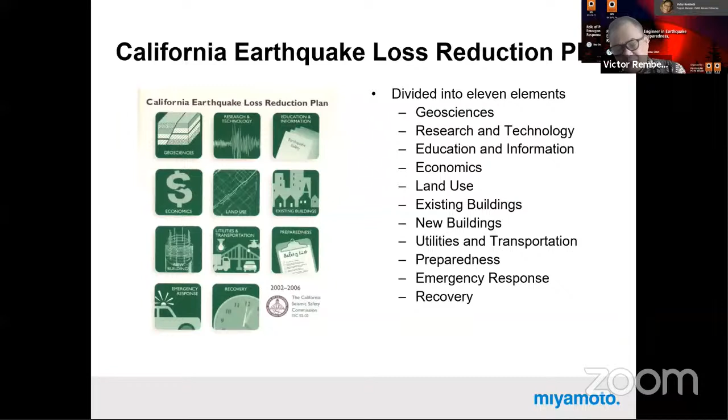Essentially, we provide many different guidance documents. For example, this is a homeowner's guide for earthquake safety that we just recently reviewed again.

For commercial business owners, their assets can be protected - showing what kind of things they can do. That kind of technical guidance is all done by California professional engineers.

One of the things we do, through the agency, is provide hospital seismic safety guidance in California. Since the late 1990s, California has been trying to do seismic strengthening of its hospitals.

And it's not been easy. Hospitals are very complicated architecturally - complicated structures and systems, and many are older buildings that are still being used. So doing the seismic strengthening is not an easy task. It takes decades essentially to provide the safety, but that's our mission. Hospitals are really important building assets after major disasters.

In California, we have a lot of unreinforced masonry buildings - essentially older structures. You see something like this in Indonesia, Jakarta, and many other places - essentially red brick construction. Here in California, in some cases, even large buildings are made of unreinforced masonry.

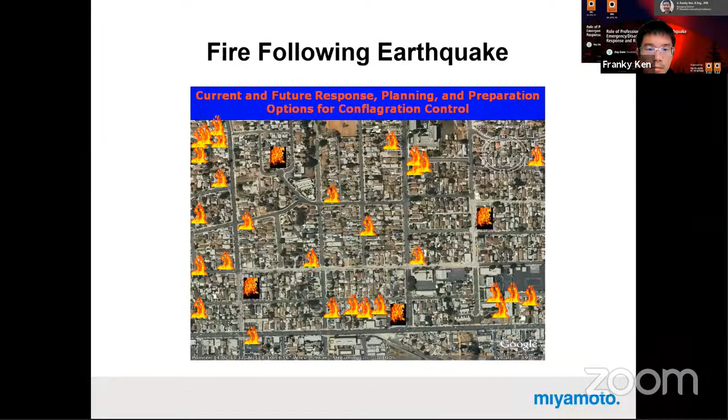In California, fire following an earthquake is a big deal, especially in a place like LA where many buildings, structures, and houses are made of wood. The expectation is that after a major earthquake, thousands of houses will be burning simultaneously. That's actually a big deal because the fire department doesn't have the capacity.

So the Seismic Safety Commission, a few years ago, set up cameras statewide to watch for fires. Now that particular fire camera network is being used for wildfires too, as you may have heard in the news - wildfires in mountains and forests are a very big threat.

This actually started as a seismic network, believe it or not, because you need a big bandwidth for the seismic network to understand the story of an eruption or earthquake. That same network bandwidth is now being used to capture the fire story - so it's multi-purpose, multi-hazard application.

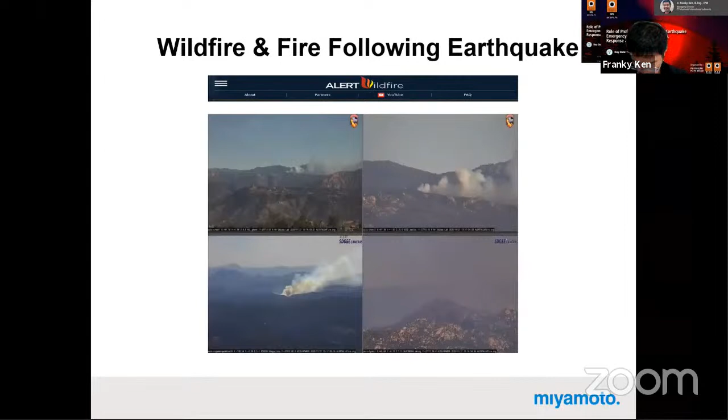At Cal OES, the Office of Emergency Services, one of the main things they do after a major earthquake is safety assessment, or damage assessment.

So-called green means inspected and safe to occupy, yellow means limited use because of certain existing damage, and red means major damage. These designations are commonly used globally now, but they actually originated from the 1980s documentation.

By the Applied Technology Council in California, and then after the California OES. That's how we started that. It was back in 2005.

So training is pretty elaborate. Training is for the evaluators themselves, the support engineers, inspectors, or architects, and also training for coordinators, such as building officials, emergency managers who actually deploy the engineers and organize forces themselves, and also training the trainers to evaluate, to train the evaluator system.

Because of engineers, many private professional engineers go to the site to evaluate damage, green, yellow, red, but they're doing it for public service. In many cases we do the volunteering. So essentially, when making that type of engineering rapid assessment, we need liability protection.

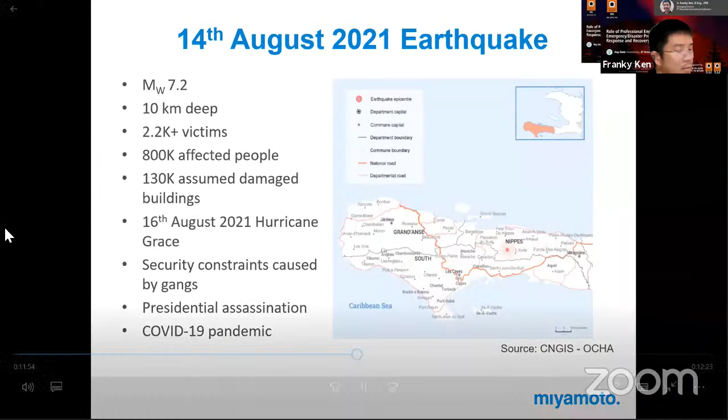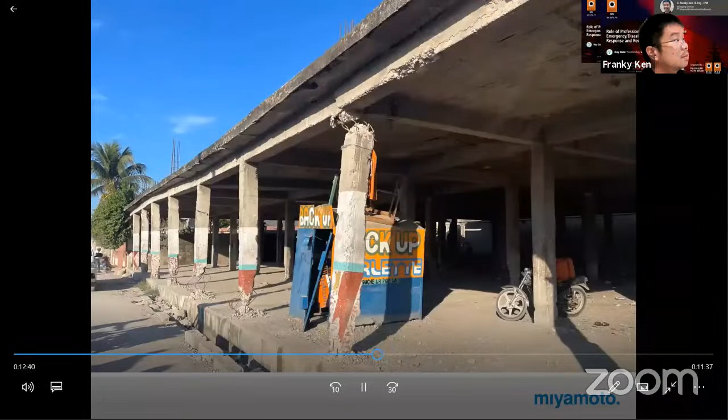This is probably where the earthquake shaking lasted 5 seconds or longer. It lost probably the whole thing. By the way, the city right here is quite far from the epicenter, at least 50, 60 kilometers or maybe more, but even that had quite a hit on construction.

It's a school again. Now, unfortunately, this earthquake happened early on a Saturday, so therefore the school was not in session, so there were very few students. If this had been during afternoon school hours, it's definitely a lot more loss.

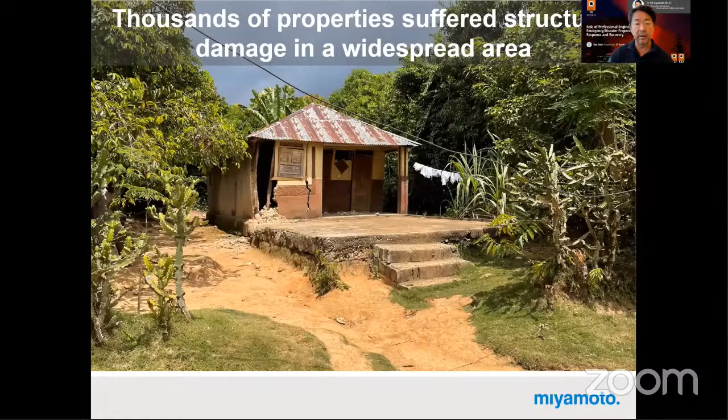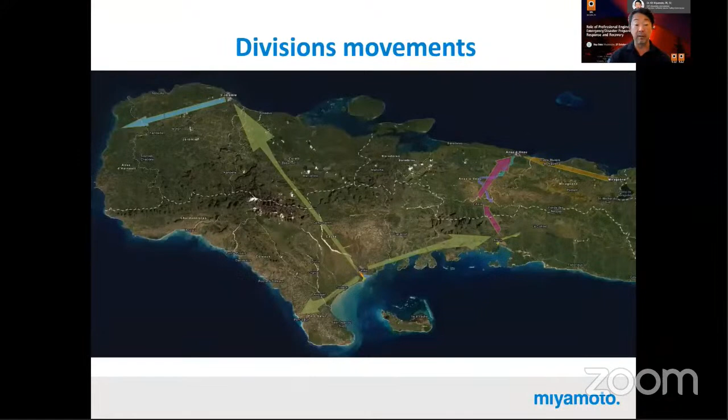Each assessment includes the basic building data, such as number of floors, type of use, material used, what kind of structural elements, concrete or wood, and also evaluates damage on the building and what percent of damage, and the measure for the damage, and displays it.

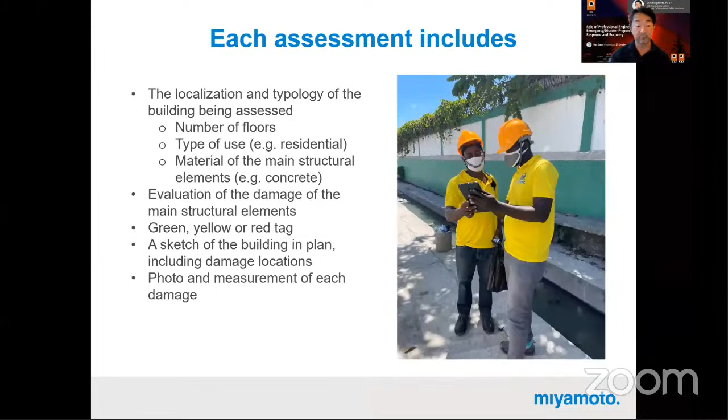Once the engineer identifies the damage pattern, reassigns the damage pattern, and measures the damage length or crack length, they can work out what methods have to be used here, and what quantity of materials, using an app called KoBoToolbox.

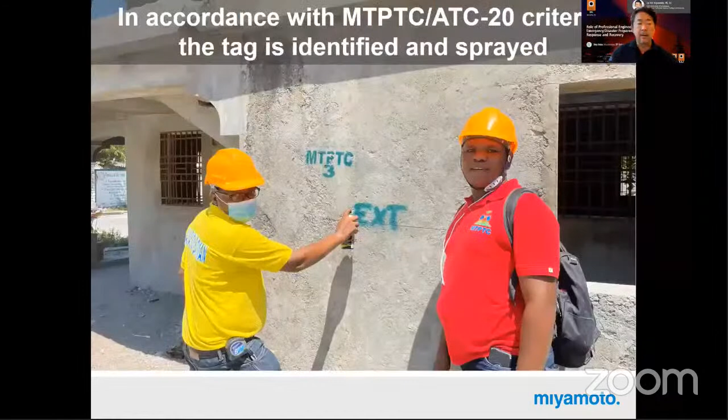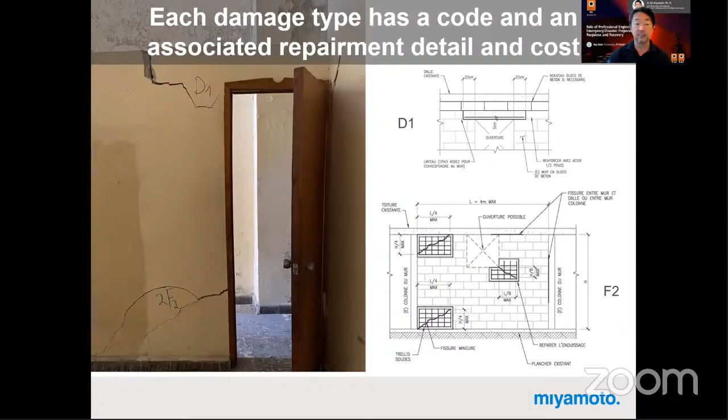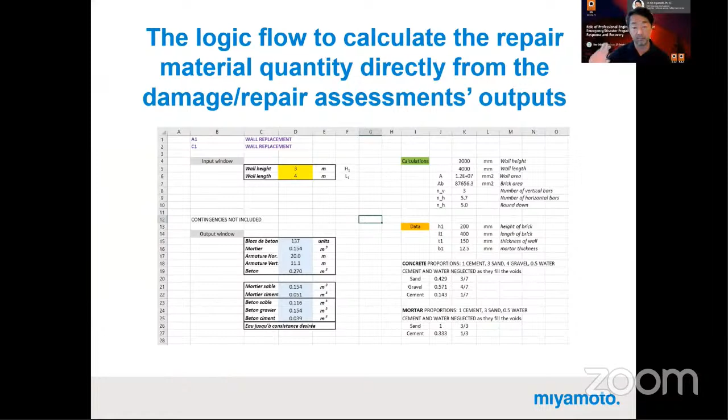On the actual building itself, this equation is analyzed, it's just a data analysis. So there's a logic flow in this KoBo database going to ArcGIS, logic flow calculations to quantify the repair functions.

So I think for professional engineers like you, our mission is extremely critical. Obviously before the disaster, for prevention, we can do a lot of things. We notice that...

Next step for us is to have wide communication and training campaigns for homeowners, contractors, and masons in the field, so they understand how to use that report, and also engage funding from different sources, because many people can't afford it. That's our job as engineers. So we are a very critical part of society. Thank you.

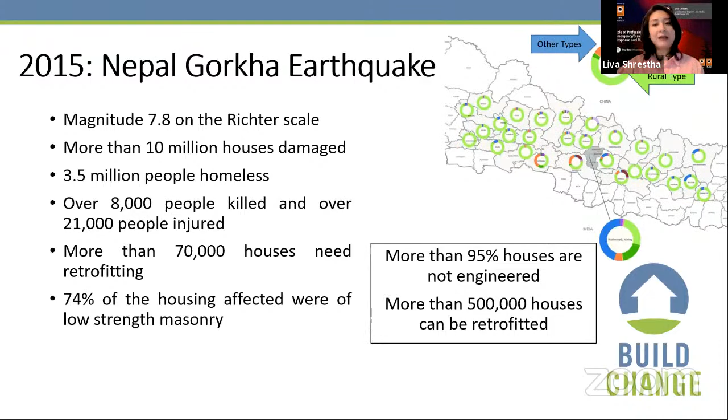In the spring of 2015, a massive earthquake with a magnitude of 7.8 on the Richter scale struck Nepal. In the aftermath, more than 10 million houses were damaged, rendering 3.5 million people homeless, and more than 70,000 houses needed retrofitting. About 74% of the housing affected were of low strength masonry, and more than 95% of the housing stock all over Nepal are not engineered.

When we talk about the housing sector and disasters, the problem that connects both is substandard housing, which refers to housing stock that does not meet safety standards, such as for earthquakes or typhoons.

In the immediate aftermath of a disaster, the priority was immediate rescue and relief. At this stage, temporary shelter was prioritized, and assessment of the nature and extent of damages and losses incurred by the disaster was done. Then comes the recovery phase, where people start to rebuild houses as permanent housing, and at this phase people are relatively motivated to invest in safe housing, and donors are also interested in funding and supporting safer housing.

However, the effects of the Nepal Gorkha earthquake was more pronounced in the rural villages than the urban centers. People in the rural villages resorted to traditional practices of house construction, and could neither afford hiring an engineer nor felt the need to do so.

Experienced structural engineering manpower willing to work for rural housing and informal settlements was scarce at that time, as the demand in the commercial sector in the urban centers was very high and more financially rewarding. On the other hand, there was an abundance of fresh graduates and young engineers without much experience, but very enthusiastic and willing to go out in the field.

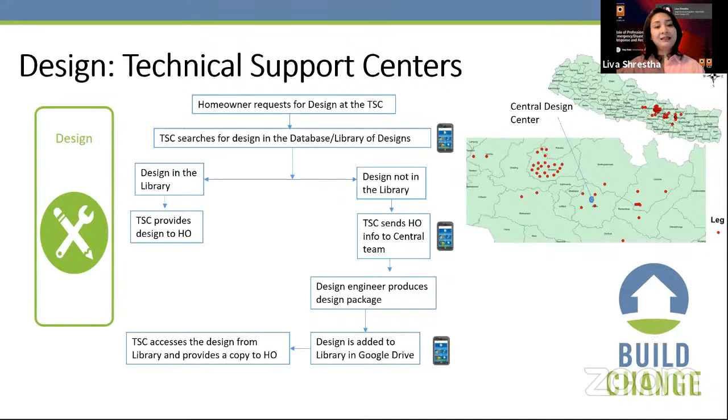The design process itself looked as such: the site engineer, who could be a very young graduate based in the district, would collect information from the homeowner and send a new design request to the system. The supervisor at the central level would then look at the requests coming in from all the TSC locations and assign them to design engineers in the team, who would again be professional engineers at the central level.

These designs would then be reviewed by a more experienced engineer and only forwarded to the design library if approved. If the review process doesn't approve it, the design is sent back to the design engineer with comments.

The advantage of having this mobile app-based database system was that it was possible to keep digital tracking of the design process, from when the homeowner made the first request to when it was delivered. This allowed us to identify flaws or bottlenecks in the design process and make changes to be more efficient as a team.

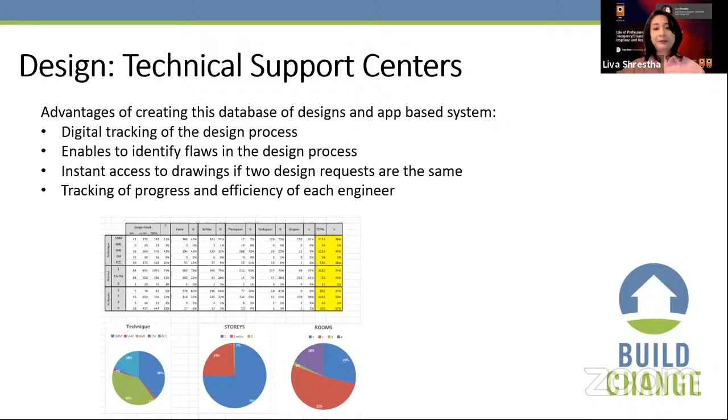Another feature of the system was that senior management and clients could be given access to a dashboard with desired information readily available at any given time.

Most of these buildings were 2 stories with an attic. Walls were usually 18 inches thick, made out of stone units in mud mortar. The floor system had a central timber girder beam, which supported the timber joists. These houses usually had a low story height of 2.1 meters, which was quite good for its stability.

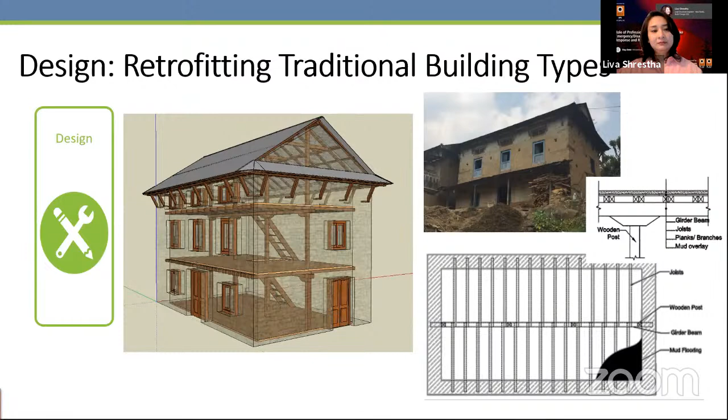Now we observed that the damages in these houses were also quite similar across the earthquake affected districts. Not surprising, of course, as they all had similar structural systems to start with. The most common damages observed were delamination of these thick walls, where the inner and outer wythes of the walls act as two separate walls and try to separate during the shaking.

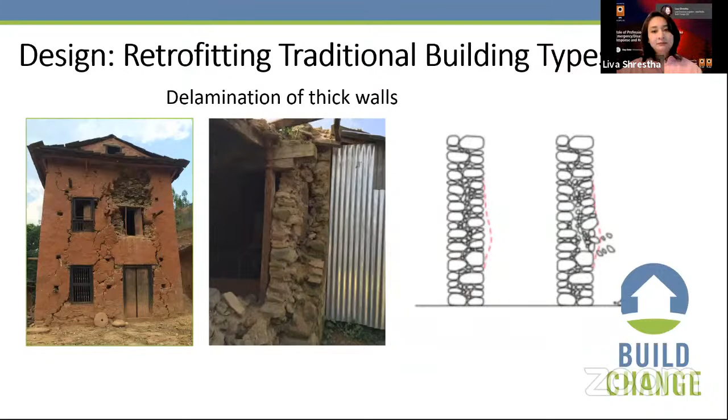We also observed a lot of gable wall collapses. We also observed a lot of short wall out-of-plane damages or collapses. And we also saw indications of common construction practices throughout these affected earthquake-affected districts.

Now, since the problems were similar, we could definitely provide a solution that was also similar for most of these houses. We knew that in a post-disaster situation, when the need for retrofitting is very high, the conventional method of preparing a bespoke design was just not feasible. We came up with a retrofit type design, which is one solution fits many situations.

The engineering rule checks were defined based on many design iterations of critical design conditions for these houses. A team of experienced engineers at the center produced the design based on various iterations of the building parameters, such as a range of variations in length, breadth, height of the house, range of variations in pier sizes, considering maximum number of openings in both directions, maximum openings in one direction and no opening in the other direction, and such. The team also carried out lab tests, such as the cyclic shear test under axial loads, dowel push-out tests, compression tests, etc.

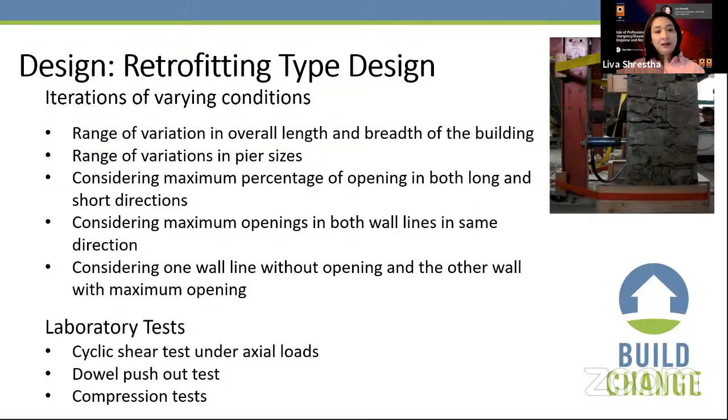Now, the type design included addressing the deficiencies observed in these buildings, such as fixing the delamination by providing a through connection through the thick walls, providing light gable walls instead of the heavy gables, providing light beams at the top of the walls at each floor to keep the walls together, providing strong backs to increase the out-of-plane capacity of walls, providing jacketing or plastering to increase the in-plane capacity of the walls, etc.

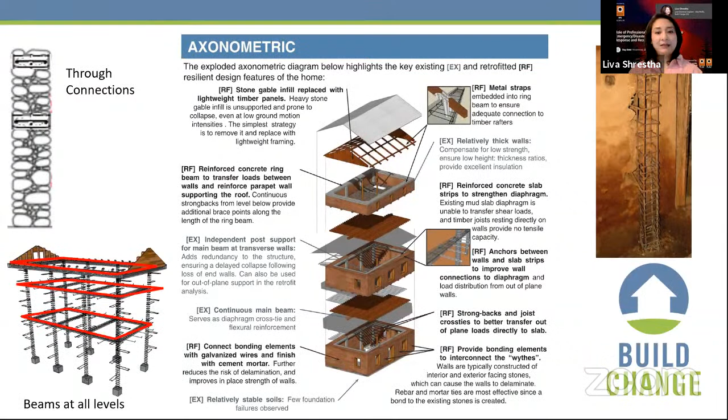Now, once the design was ready, the type design was presented in a format such that a very young graduate engineer could use it easily in the field, as the design could be readily applied to any building that fulfilled a set of predetermined applicability criteria, called the go, no-go criteria. This included grouping the buildings in terms of a list of criteria, such as building dimensions, existing damages, geotechnical conditions, opening alignments, opening numbers, etc., and applying the same design with simple rule checks to the ones that pass the criteria.

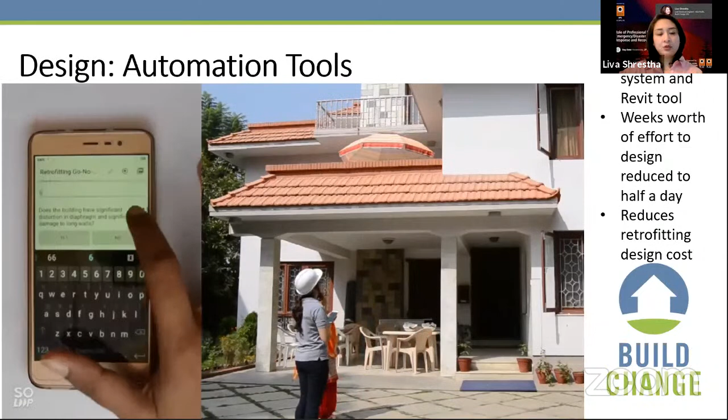Now, in addition to using the type design approach, which enabled thousands of young engineers to use the process, we have a video that shows the complete retrofitting process. I think the audio is not working.

No audio, cannot hear anything. So maybe I will just voice over it. It's basically all the information from the house that is collected in the mobile application. Please play the video, I'll just explain it as it goes.

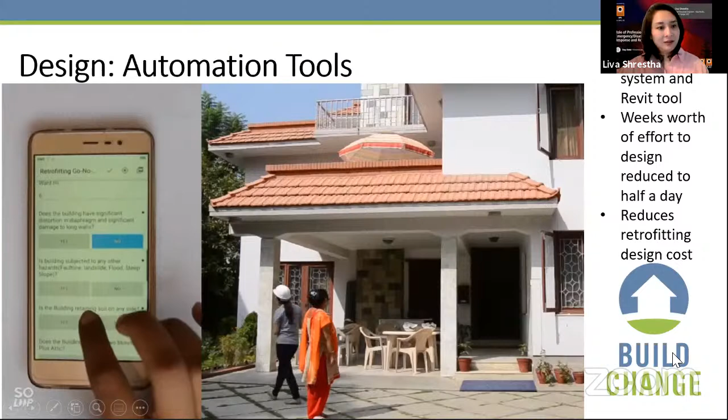So all the information regarding the dimensions, the house dimensions, everything is entered in the mobile application. We used an application called FieldSite for this.

Now, once the criteria of go no-go is checked and the house passes the criteria, then we deem that this house is retrofittable with the type design.

Now, the second part is to carry out full measurement of the house, including position of walls, length of walls, and all that information, and it is entered directly into the mobile application.

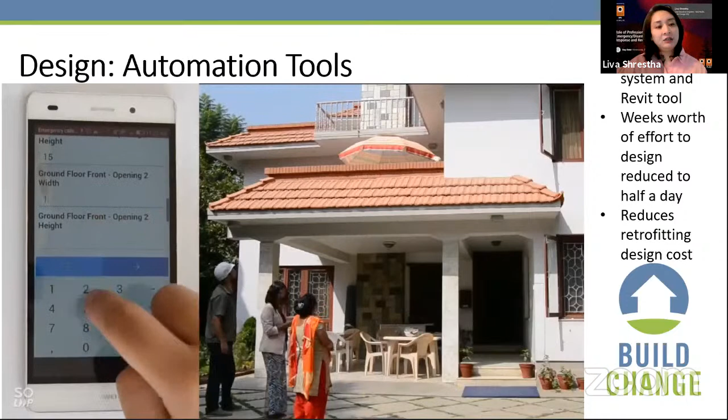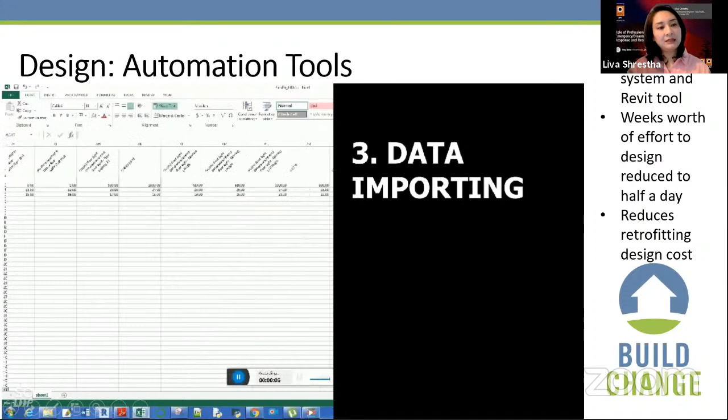Now, when this mobile application information is synced with the computer, it can directly download that data in Excel, which is then connected to Revit using Dynamo programming, which then models the house itself using that information. So it is a very convenient paperless system.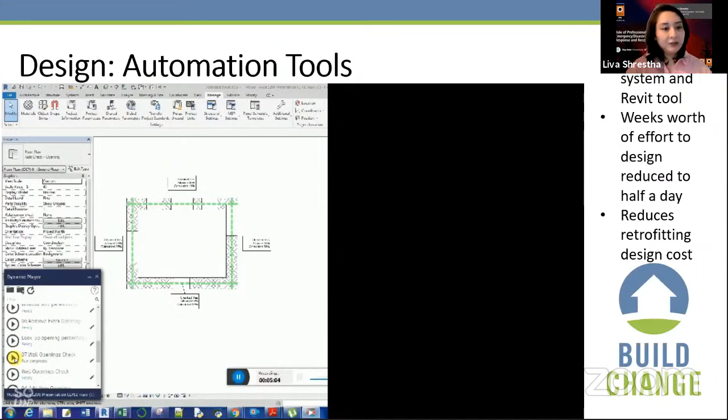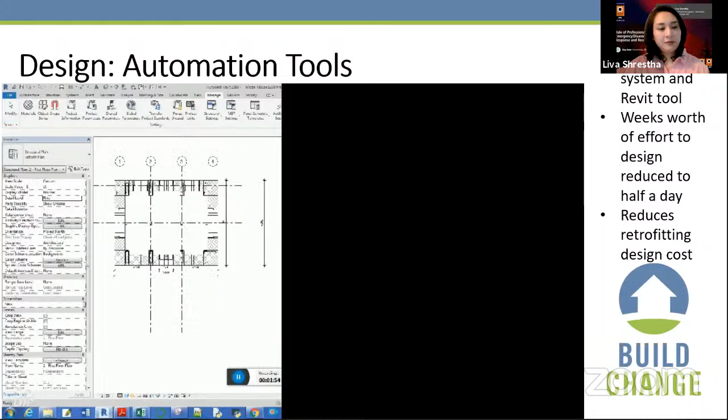It can also perform technical checks, such as the spacing of the strong backs, the spacing of the walls, and such. Once the design package is completed, if there's any modification that needs to be done, that's discussed with the homeowner and recorded in the drawing itself. And thus the final drawing packages for the retrofitting are produced, including the architectural and structural drawings and the BOQ.

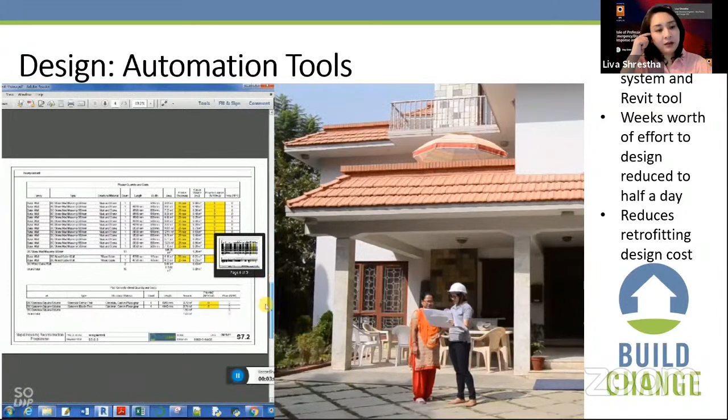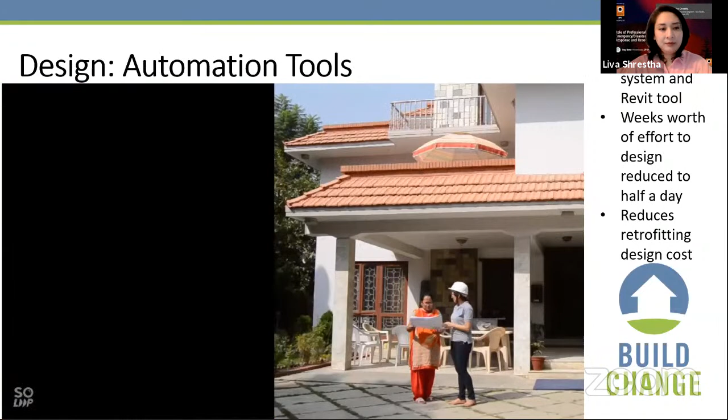Which is then handed over to the homeowners. It contains a full list of BOQs and all the information for the homeowner to start their construction work on retrofitting. Using this system, we could reduce weeks of engineering efforts to half a day of work of a semi-technical person. This greatly reduced the cost of design delivery, because once the type design was set, we did not need to use too much hours of an experienced engineer—even a young graduate or a semi-technical person could use this system and produce a design set in a matter of hours rather than days.

With the help of this system, we provided over 500 retrofit designs to homeowners across 77 municipalities and 19 districts in the high affected zones post-earthquake.

Financing is another important part of the construction value chain. Most of the financing for the reconstruction came from the homeowner's personal savings. The government also provided some financial support to construct a new house or to retrofit as well. Even with the available financing, most homeowners could only construct a small house, and they would most likely resort to unsafe expansion in future as they came into more money or as their family expanded.

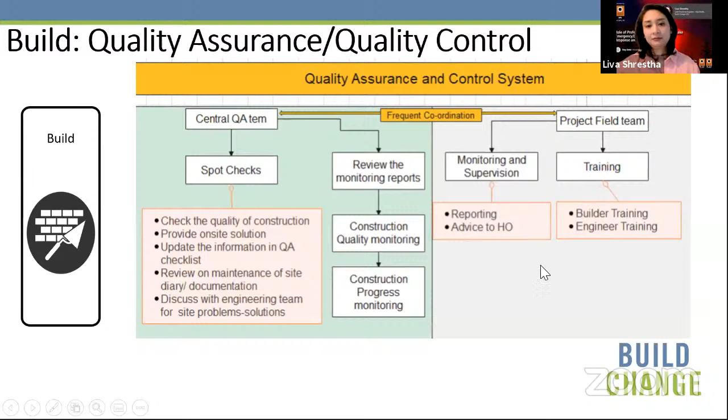We also created a mobile-based system for construction quality monitoring, in which every time an engineer visits a site, they record the site progress, site issues, as well as pictures. The information is then sent over the internet to the main server so that the central team can review it. The digital platform can also monitor the date and time of each engineer's site visit, the construction progress at sites, and construction quality issues, and managers can have a dashboard with all updated information at their fingertips.

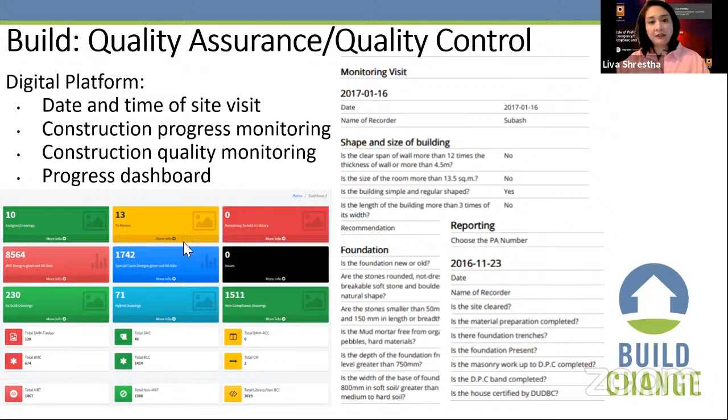So we have tried technology wherever possible to make our systems more efficient.

Now we have a video. I'm not sure whether the sound will work. I don't think the sound is working, but that's okay—let's skip the video for now.

Basically, we've tried to use technology wherever possible to make our systems more efficient. This video is about how we can use artificial intelligence to make systems even more efficient in the post-disaster context. This is still in the initial testing phase, but it is definitely a tool that we can look forward to using in future disasters.

Just a few pictures from our retrofitting clients. This is a house in Eklephant. As you can see, we made small changes such as replacing the heavy gable with light gable connections.

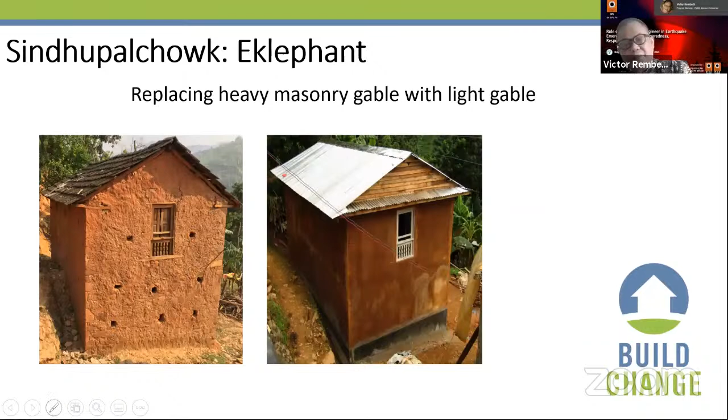We provided simple connection improvements in the roof, such as using a GI wire mesh to design these connections, which are very cheap, easy to use, and easy to train local builders in.

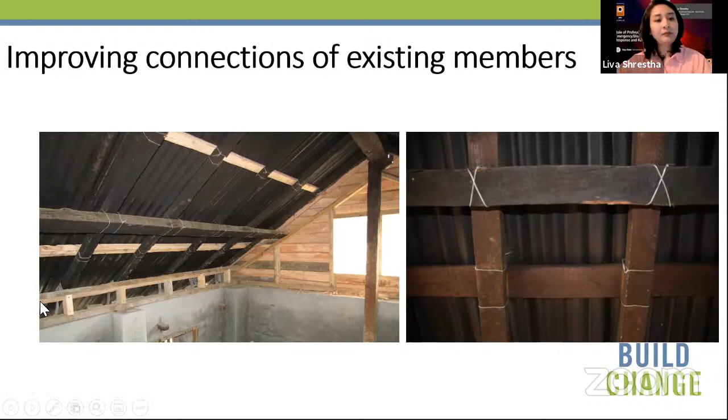And then, of course, improving connections to existing members, such as member-to-wall connections, roof treatments, and things like that.

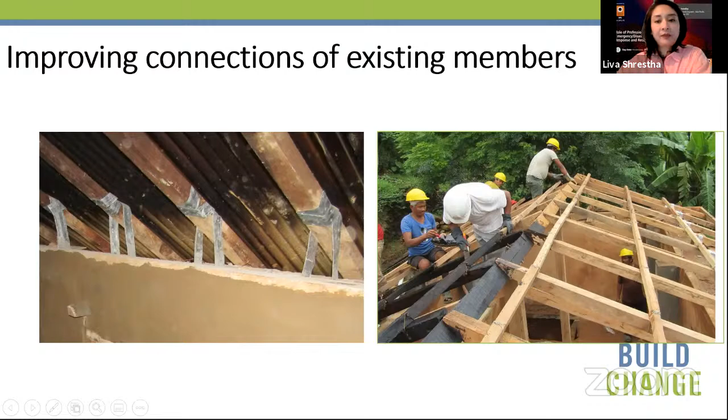Some before-and-after pictures: this is in Siangja Bazaar, Nepal, and this is in Besi—a before and after picture of a retrofitted house.

This is an interior of a typical house in Nepal, the type of traditional houses that we retrofitted.

This is another one in Kavre. As you can see, most of these houses are very similar in terms of their configuration and their structural conditions as well.

A few pictures of the builder trainings, please.

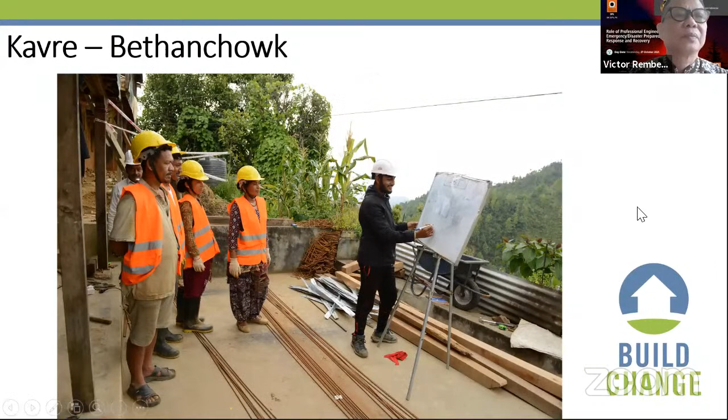This is the ring beam installation for the wall. This was all done as on-the-job training for engineers as well as for builders.

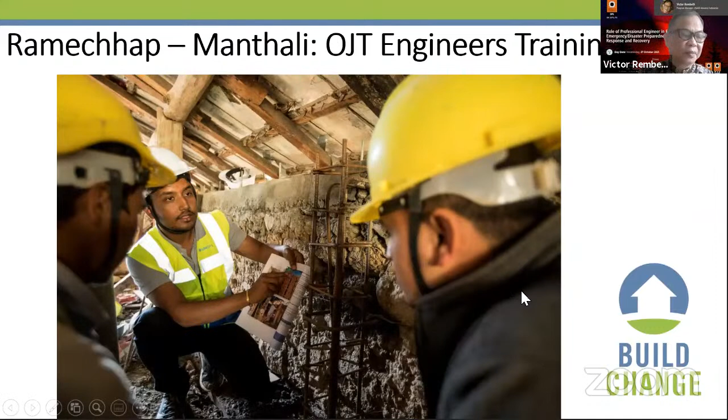So we come back to the question of how we can achieve sustainable and safe housing at scale, especially after a disaster when resource constraints exist. First and foremost, I think we need to make solutions simple to use and accessible to technical as well as non-technical people, such as homeowners and builders. Even though engineering work at the back office is inevitable, we need to ensure that engineering front office is simple and accessible to young engineers, builders, and even homeowners.

We must increase access to financing for constructing safe houses. We need to make the technologies affordable through efficient designs, but also by providing an incremental approach to reach safe housing standards. We also need to reduce the cost of engineering by being more innovative in using technology and other tools to be more efficient in delivering services.

Since more than 85% of the building stock in Nepal consists of low strength masonry typologies, courses on designing or improving such buildings should be included in engineering course curriculums. We also need to ensure that engineering provides solutions and does not create bottlenecks in the process of a homeowner achieving a safe house. With that, I conclude my presentation today.

Thank you. Thank you. You're welcome.

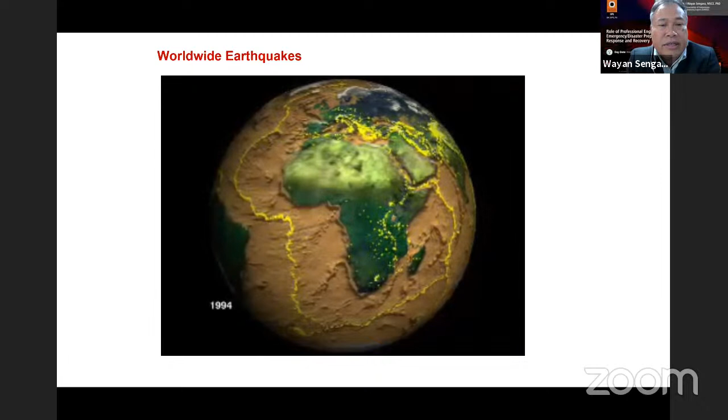Okay, let us start with the seismicity of the world. As you can see here, from 1961, probably all countries in the world just struggle to mitigate earthquake disasters due to the occurrence of many earthquakes because of global earthquake tectonics. And also, as you can see in Indonesia, from the last 50 to 100 years, many earthquakes just occur, about every 2 to 3 years there's an earthquake.

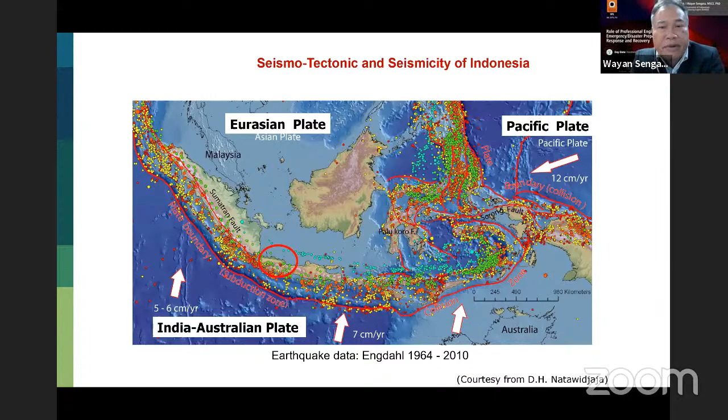As you can see here, this is the record from 1964 to 2010, 2005 earthquakes, showing almost all of our islands are potentially subject to earthquake occurrence. This is because of the existence of our country on the plate tectonics of Indo-Australia, Eurasia, and also Pacific plates, and also the Philippine plate.

So as you can see here, I have been involved in many disaster surveys from 1992, just when I came back from the United States. I'm not an earthquake engineer actually at that time, but in front of us there was an earthquake and tsunami in 1992, so we went there to see how the buildings had been damaged and collapsed. After that, every 2 to 3 years there was another earthquake all over Indonesia, from Flores to Banyuwangi, Liwa, and so forth, with magnitudes from 6, 7, even 8, and finally in Aceh 2004 we had a very large earthquake, magnitude 9.2. After that, many other earthquakes followed.

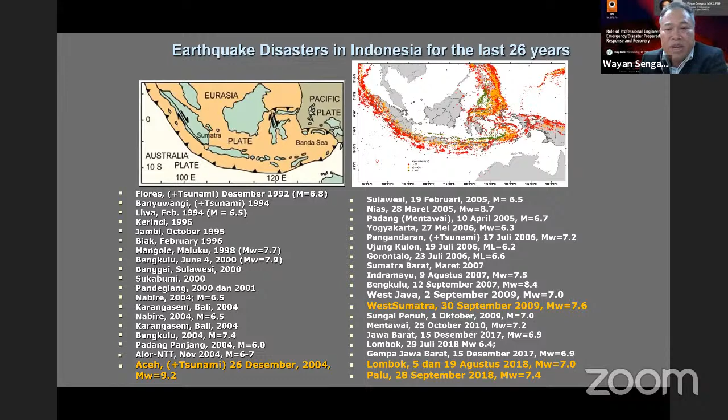So finally, in 2018, 3 years ago, we had a liquefaction event, maybe one of the largest liquefactions of the century, with magnitude 7.4. This is just a flashback of how buildings in Indonesia have been damaged and some collapsed. Not only buildings, but some infrastructure like bridges, slopes, and so forth.

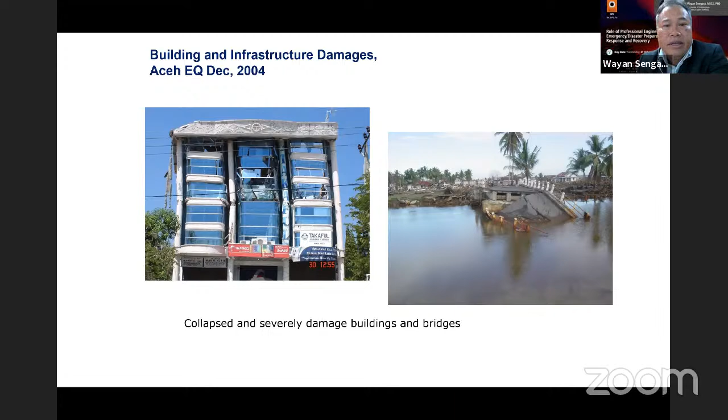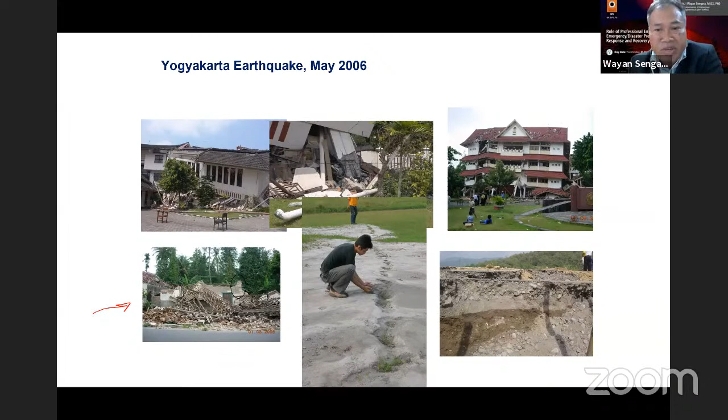This is from the Yogyakarta earthquake. It just completely collapsed. Unfortunately, also some engineered buildings, some government buildings, also collapsed, as you can see in this picture. Some liquefaction also occurred, some slope stability issues, some slopes failed.

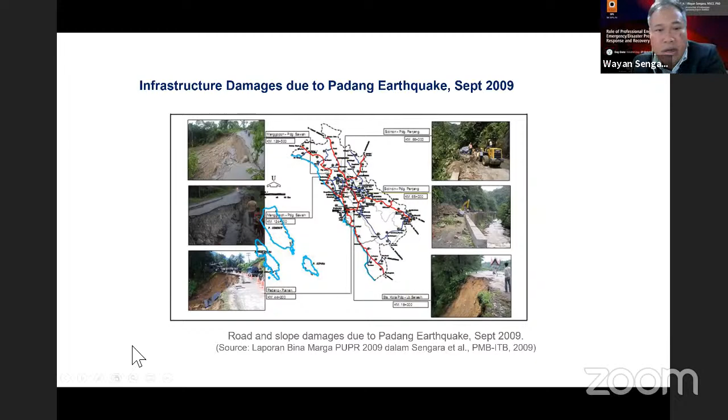And some roads also, this is the Padang earthquake in 2009. As I can record, some of the roads cannot function because of slope stability issues.

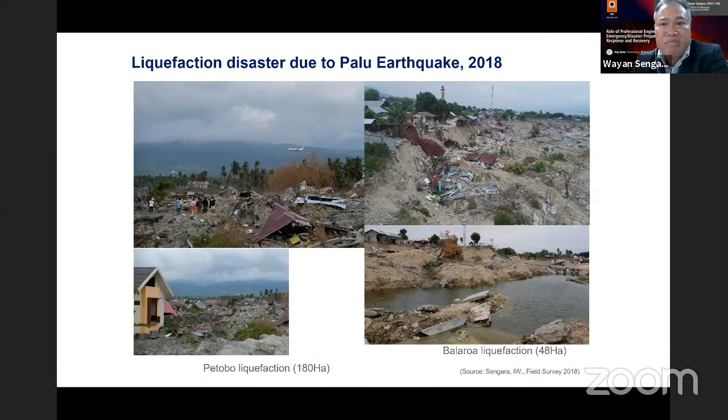And this is from the last one in 2018. We had a large liquefaction event. So this is some of the, maybe, building on the liquefaction potential area that needs to be limited, because we cannot have a building on top of a liquefied area like this.

Okay, let me share the identification of building vulnerability and its associated risks. This is rather a response of the 2009 Padang earthquake, where our interest here is some research and response of earthquake engineers to deal with building damage, and how we propose improvement of building quality for new construction.

As you can see here, in any earthquake occurrence, the building will respond to various levels of probability of damage, from slight, moderate, extensive, and complete, depending on the shaking itself, and also depending on the vulnerability of each building, and also various types of building, from non-engineered building to concrete or engineered building.

So several post-earthquake disaster surveys had been conducted in Indonesia, and showed that the collapsed buildings were mostly non-engineered buildings, but some engineered buildings also consisting of 1 or 2 stories, we also found experienced damage and even collapse. So this is due to poor structural quality of the building.

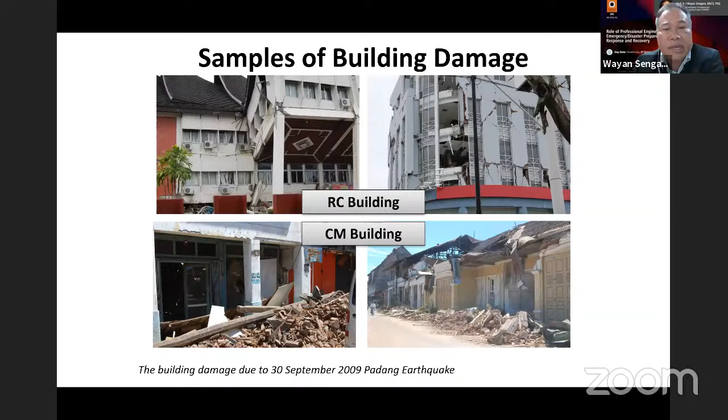We also did some tagging, like what Mr. Miyamoto conducted in Haiti. I think we have a red, yellow, and green tag for many buildings. But more than that, we identify the particular damages of the building to have more information about the building. So we identify reinforced concrete buildings, confined masonry buildings, non-masonry like this, and even unreinforced masonries.

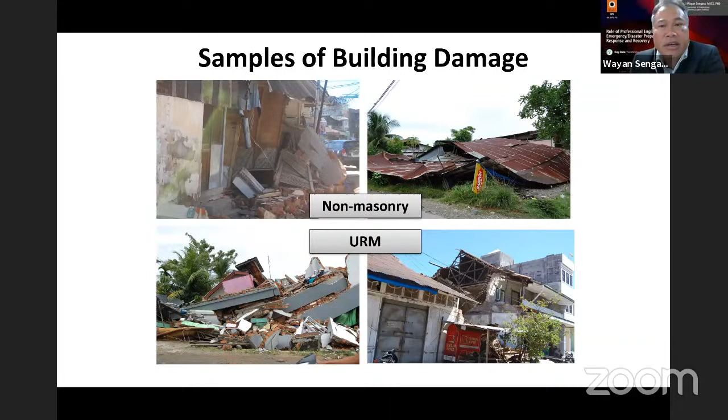Okay, this is a message actually to our engineers. This might be difficult for many of you to understand. This is the MMI, the modified Mercalli intensity. This is like a peak ground acceleration with the damage index. So this is the percentage of potential damage of buildings that we have surveyed. We came up with 9 benchmark damage models that we can use to predict what is going to happen.

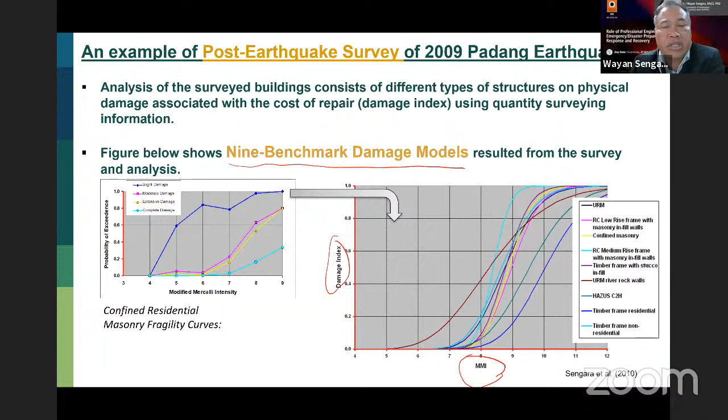With the existing building, if we have earthquake shaking of various MMI. So this can be used for disaster risk assessment for buildings, to see how vulnerable the building is to potential damage. So we have submitted this to BNPB. I think this is one of the results that we contribute to the Indonesian emergency response for future potential earthquakes, so that we have an idea on how we're going to assess, or how we're going to retrofit some of the essential or vulnerable buildings.

Some of the buildings, I think, were designed based on the 2002 seismic building codes. As you can see, some of the buildings are relatively new, and we didn't see a lot of damage, very minimal damage. So this is a successful practice, we consider. If we could satisfy the building codes and also do quality control and quality assurance of our buildings, then we can save a lot of lives.

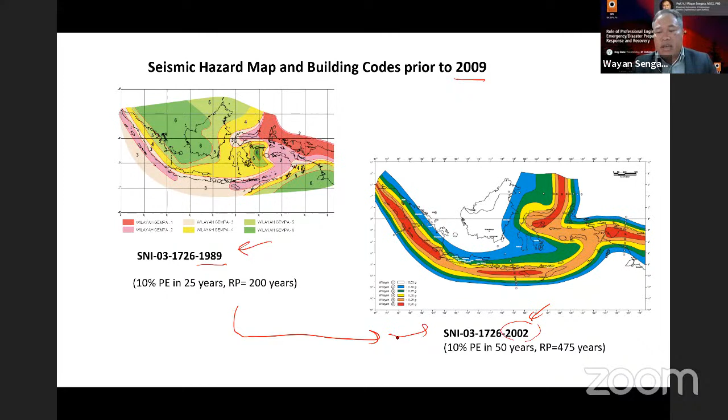So let's now go to enhancement of Indonesian seismic hazard map. First Indonesian hazard map had been developed by Beca Carter in bilateral cooperation between Indonesia and New Zealand in 1978. So at that time, the knowledge of the seismic hazard mapping also not yet developing well.

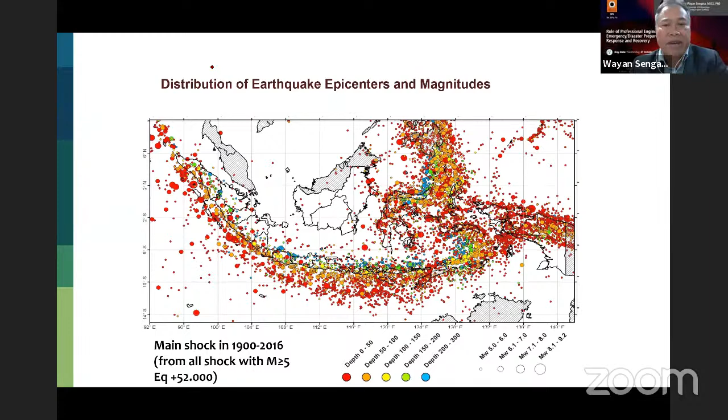So all the data that we have collected, I think from 1900 to 2016, there was 52,000 earthquake data of magnitude higher than 5, and we use the most recent methodology and ground motion predictive equation to come up with a seismic hazard map, with methodology similar to what USGS, United States Geological Survey,

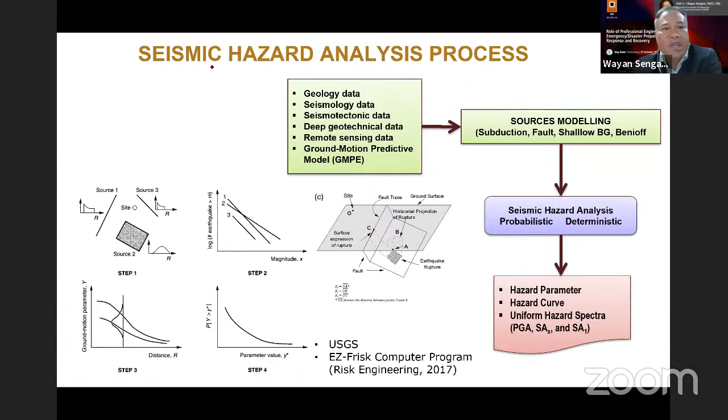uses for the United States seismic hazard map. And as you can see here, this is the evolution of our seismic hazard map from 1983, 1989. So this is a return period. I mean, this is also associated with the risk, with a 10% probability of exceedance in 25 years. So the risk for this map is actually a return period of 200 years.

In 2002, as I already mentioned, the risk is actually increased. The return period is 475 years. So that means we try to increase the risk, the probability of occurrence, probability of exceedance of potential earthquake that will hit our buildings.

While the development in seismic hazard map, particularly in United States, that we refer to, increased the return period up to 2% probability of exceedance in 50 years. So the return period is equivalent to almost 2,500 years. So then the risk is reduced.

Further in 2017, in our Indonesian seismic hazard map, we keep using that. But later on in the seismic building code, I will inform you on the development of the building codes with reference to the International Building Code of the United States. So this is the process of refining our map.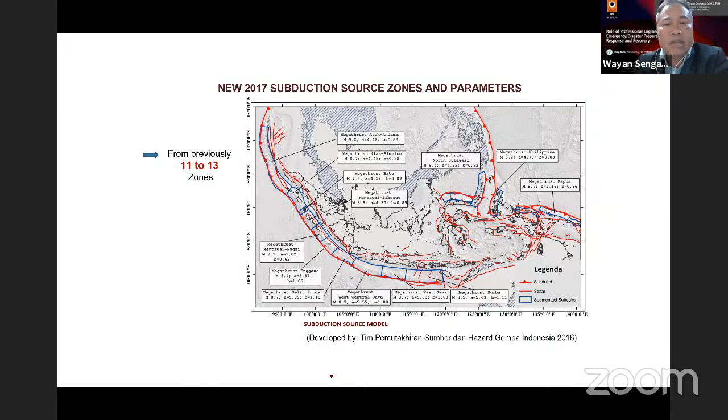So finally we have, and also we adapt ground motion predictive equations. The most recent, I think the most recent is 2015 here. Our map is 2017, so it's pretty new. So this is the most current map that we

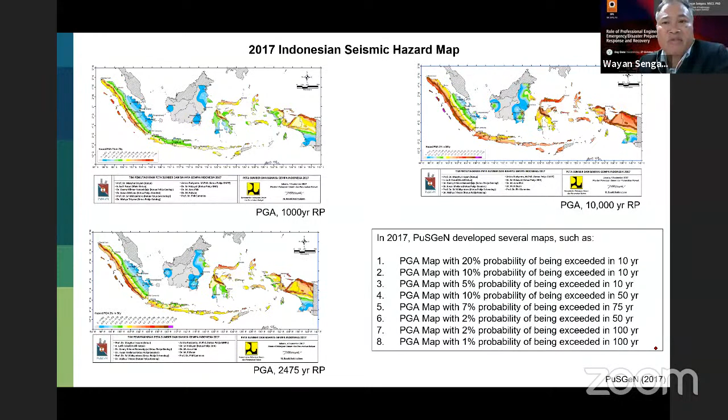recommend for the Department of Public Works for buildings, for dams, and for bridges. Okay, let's go to how this seismic hazard map is accommodated in seismic building codes to have a better design of our building, our bridge, our dam, our port.

Particularly for buildings, ATC 40, Applied Technology Council performance-based design, actually requires damage control, life safety, and also structural stability at the level of collapse prevention of the building.

So our code is also involved in satisfying this requirement. The 2017 map that we have generated and developed was adapted for the 2019 Indonesian seismic building codes to satisfy this requirement. So Indonesia became one of the countries in Asia to follow the international building codes, and we have a map associated with those codes.

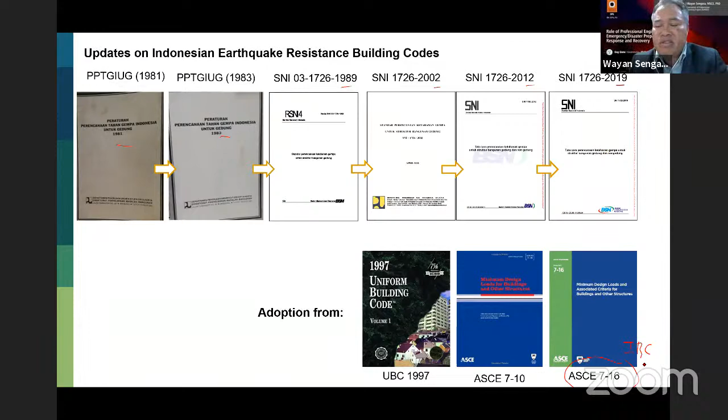Let me go through very quickly how our building code evolved, from 1981, 1983, then 1989, 2002, 2012, and finally 2019, with reference to American Society of Civil Engineers 7-16, which is also referred to by International Building Codes of 2018. This is rather technical.

Our building actually needs to be designed with uniform risk. Previously, the 2002 building code was based on hazard-based spectra. The hazard is uniform, but actually the risk is different. So Indonesia followed the United States development in building codes, from IBC or ASCE 7-10, and then finally ASCE 7-16, and we came up with the current Indonesian seismic building code of 2019.

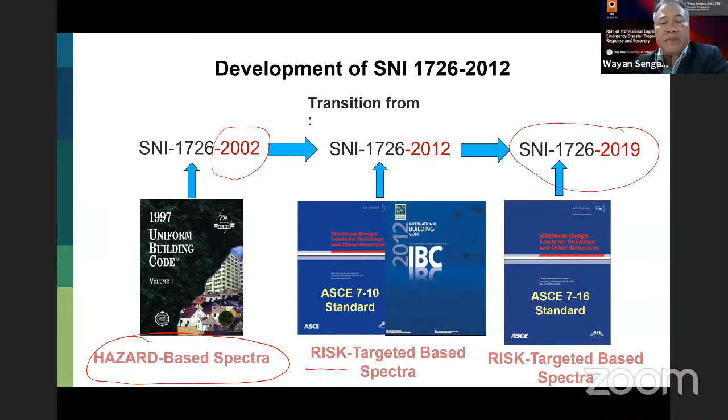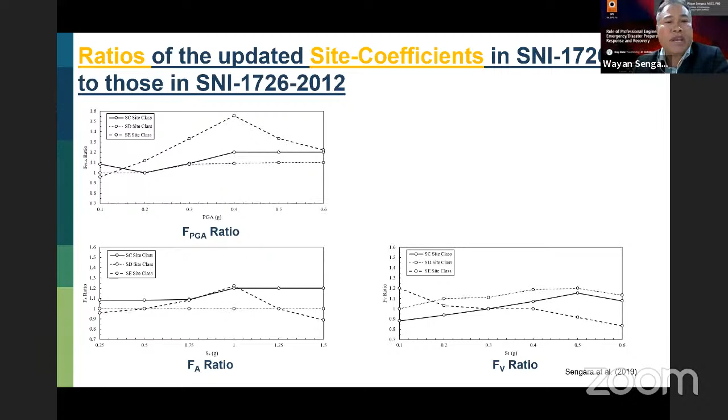We hope that if we comply with these codes, our buildings will be less vulnerable. That requires a lot of effort and involvement of professional engineers. This is only part of the process of how we enhance our building code with parameters related to site condition, and how geotechnical data needs to be used for developing or proposing parameters related to design spectra.

We need our designers and consultants to understand and master the building codes, and then do the building design. This also relates to building compliance and permits - how do we enforce the building designs to provide permits, so that the building proposal satisfies the building requirements.

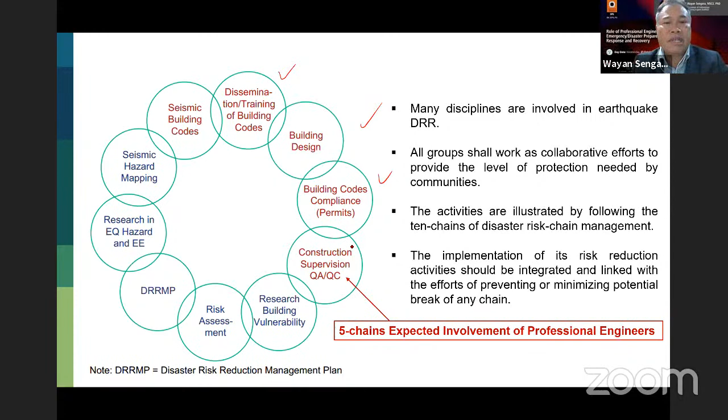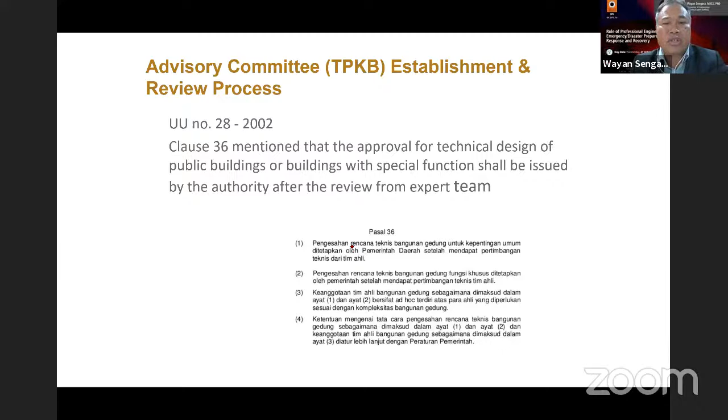And then with construction supervision, we hope to do a lot of disaster risk reduction. This is the experience of Jakarta City - there is an advisory committee established for the review process of building design, under a regulation from 2002. This is in general the process.

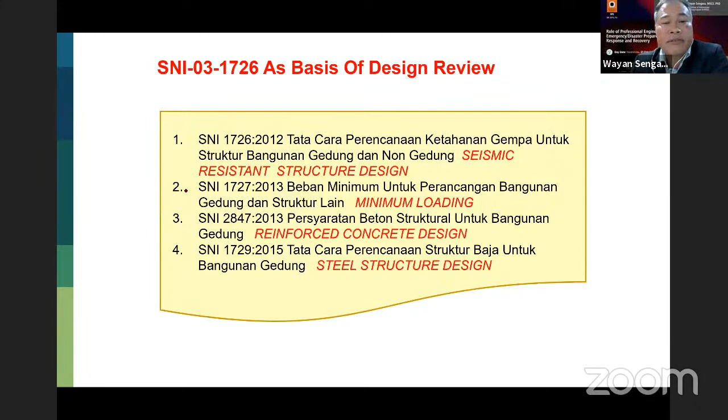So the engineer has to have a PE certificate from the association, and also a PC license from the local government. The advisory team will review the building design and recommend to the municipality to issue the permit after all requirements have been satisfied, along with some other codes that need to be satisfied for the building permit for new construction.

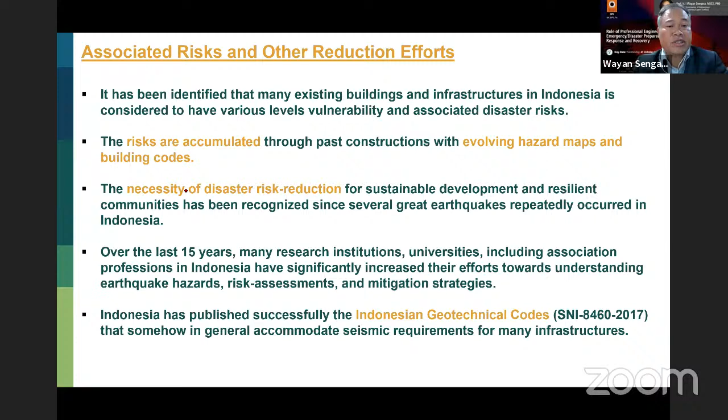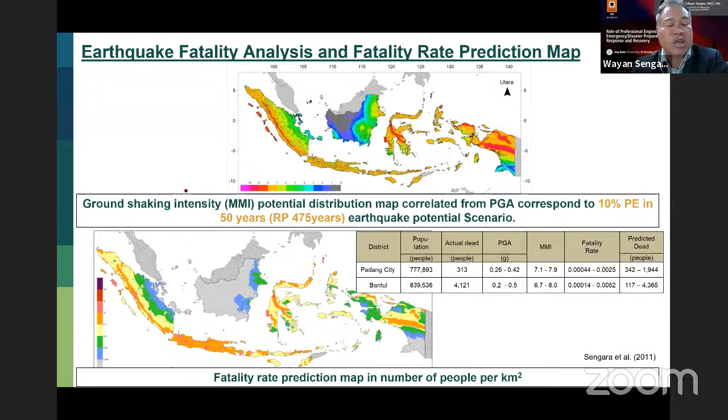This is the potential fatality. Based on our survey, we identified the number of fatalities from Padang City, Bantul, Yogyakarta, and many other earthquakes in Indonesia, and came up with a prediction of fatality. For the whole of Indonesia, Java is the most vulnerable, with the highest potential fatality rate.

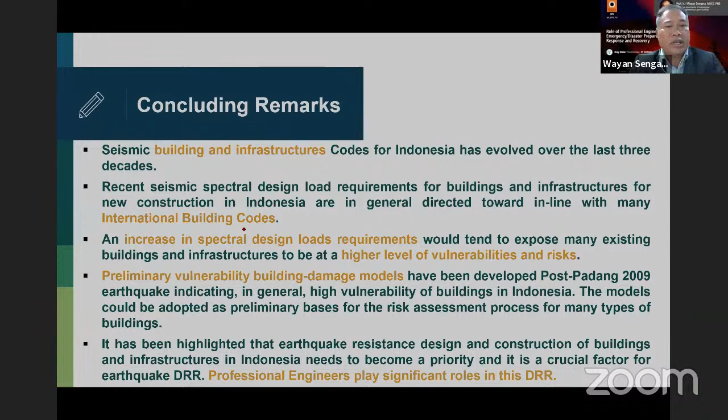So I would like to highlight how the professional engineer plays a significant role in this reduction process. What is the essential effort to prevent or minimize building infrastructure collapse for future earthquakes? This is through provision of proper engineering design parameters. So it's a challenge for professional engineers to update their knowledge to have the most up-to-date knowledge for proper engineering design parameters, and also continuous improvement.

So as I already mentioned in detail, the code shall later be legally referred to and embedded within the local regulation. This is also important. We have a map, we have codes, but if it is not legally referred to in the local regulation, it will not be effective.

Proper design, good quality construction, building and design enforcement with the building authority - not only Jakarta or any big city, but every city that has potential for earthquake disaster - needs to have this advisory committee. I think Indonesia will very soon apply what we call the TPA, Tim Profesi Ahli - in English, a professional expert team, something like that. Then a systematic and good construction supervision, of course.

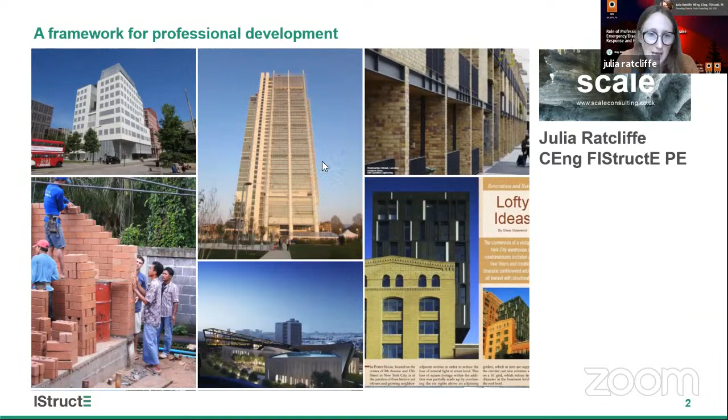And now the development panel. I'm here representing this panel. It was formed in 2017 by our chair, Tom Newby, and it's made up of members across 4 continents, some of whom work as engineering professionals for non-government organizations and international development organizations, and others within commercial engineering practices. It includes Frankie Ken from your organization, who invited me to speak today. The headquarters of the IStructE is in London, but it has members across the world, with large membership drawn from Australia, Hong Kong, India, and many other countries.

So the panel itself was pulled together to try and support the membership so that they can act in a professional and responsible way in the development sector and to respond to disasters. It recognises that people's day-to-day work might be very different from the responsibilities that they assume or situations they encounter in these settings. So as part of this panel, we've produced a number of guidance documents for members, but they're also available to people who aren't members as well.

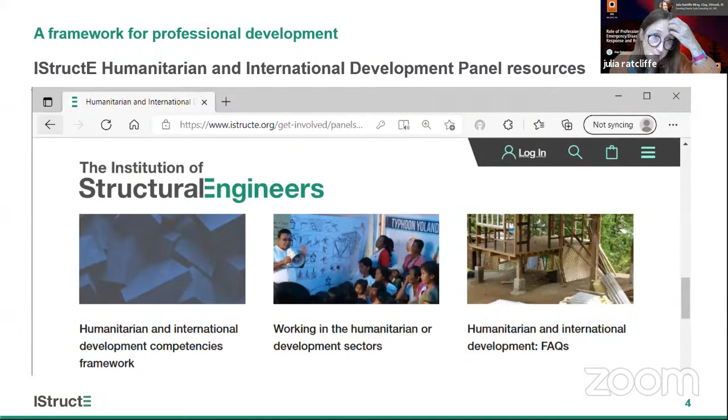To talk about these particular challenges, we recognise that there wasn't a lot of guidance for professional engineers working in these kind of scenarios. Essentially, this is intended both as a framework for individuals to assess and develop their own competencies, to identify gaps that they might have in their knowledge or experience, and also for organisations and companies who might be asked to support projects, for them to really understand the skill set that they need, and also to try and understand perhaps sometimes the unintended consequences of interventions that they might make, so that they can work in the most responsible way, and hopefully as well perhaps partner and support local engineering professionals or practitioners, depending upon where the project might be.

In putting together this framework, we drew on the experience of the full panel, and we really thought about areas where it differs from people's day-to-day work. In particular, there were aspects in relation to working where there wasn't a full suite of design codes. Perhaps the construction market is not professionalized in terms of professional workers, or it might be homeowners building their own shelter, and more simple construction that doesn't always lend itself to engineering analysis. But also recognizing that an engineer, as the only professional within these kind of scenarios, may have to take a lot more responsibility in terms of managing projects and interfacing with finances and also the communities affected, and just recognizing how engineers need to increase their understanding so that they can do that in a responsible way.